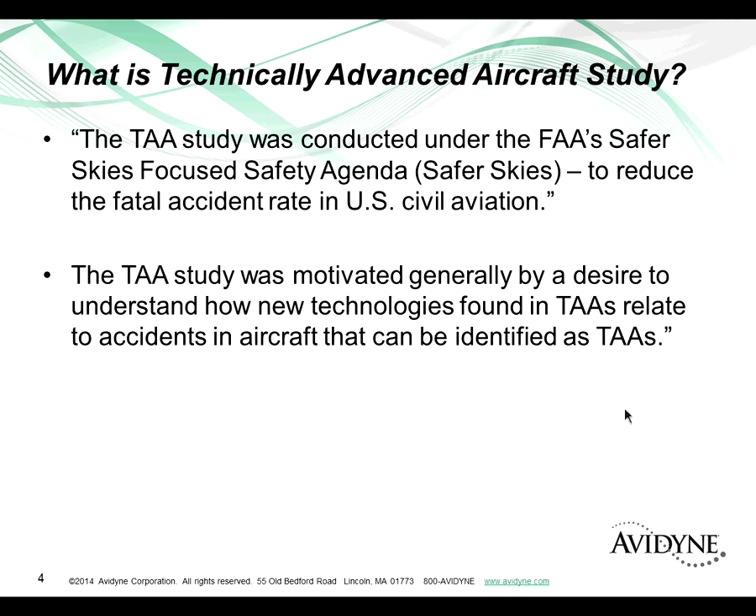But first of all, what is a technically advanced aircraft? The best way to describe it is basically any aircraft that has an IFR certified GPS, a moving map display, and an integrated autopilot. Notice that doesn't include the PFD per se, although most of those after 2003 were all PFD equipped. In general, TAAs are aircraft in which the pilot interfaces with one or more computers in order to aviate, navigate, and communicate. So you can see that encompasses a lot of airplanes.

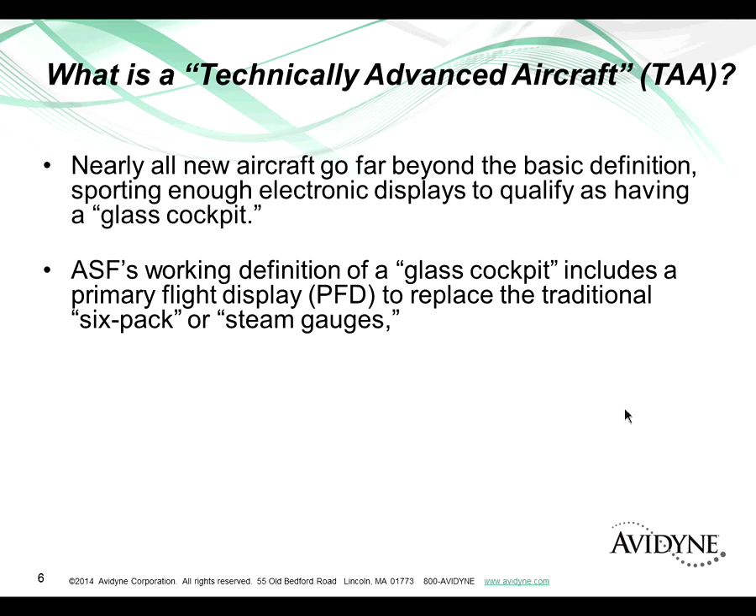Nearly all new aircraft since 2003, according to the study, could be qualified as glass cockpits because they also have primary flight displays that have replaced the traditional six-packs. These are considered technically advanced aircraft.

This goes back to when, after the General Aviation Revitalization Act was signed in the mid-90s, Cessna started building airplanes again, and they had the KMD550, a KLN94, and a KAP140 autopilot. That met the criteria - it had an IFR GPS, an MFD, and an integrated autopilot. So even though it was a six-pack airplane, it was considered a technically advanced aircraft.

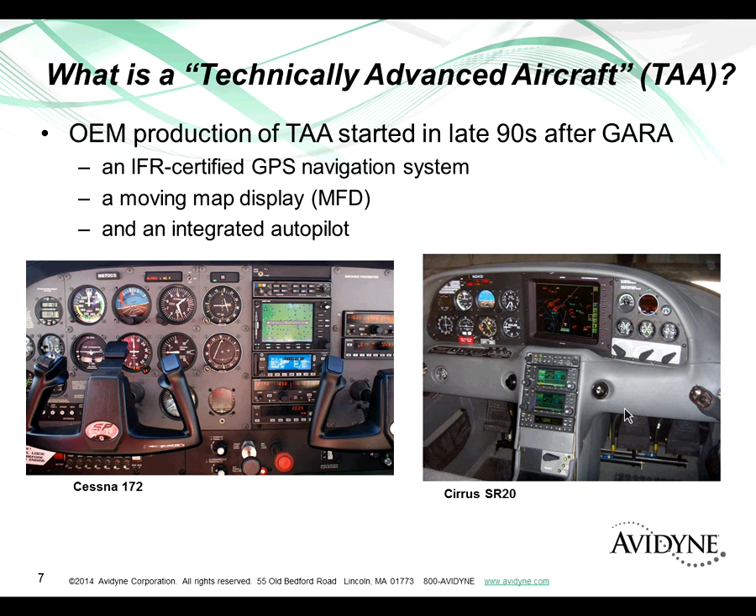Cirrus had come out with their new aircraft, originally with the big ARNAV MFD along with dual 430s, and they put an STEC system in a lot of those airplanes. So that, again, was a technically advanced aircraft without PFDs.

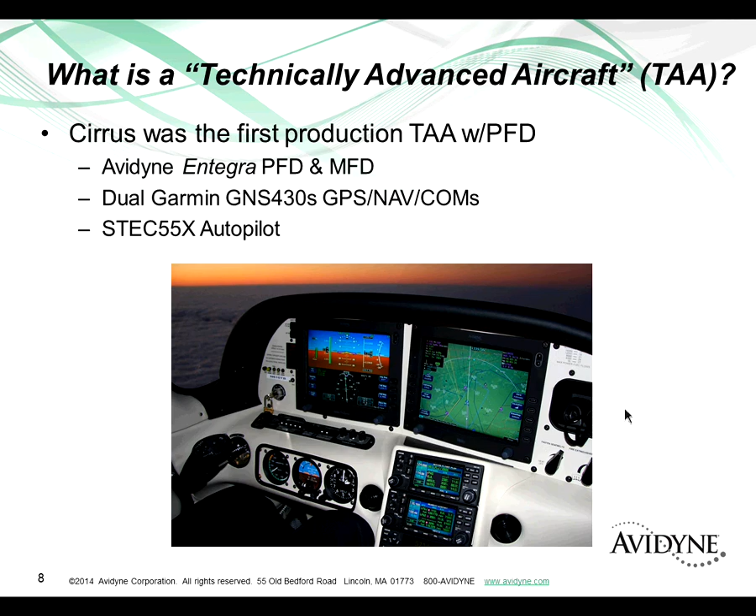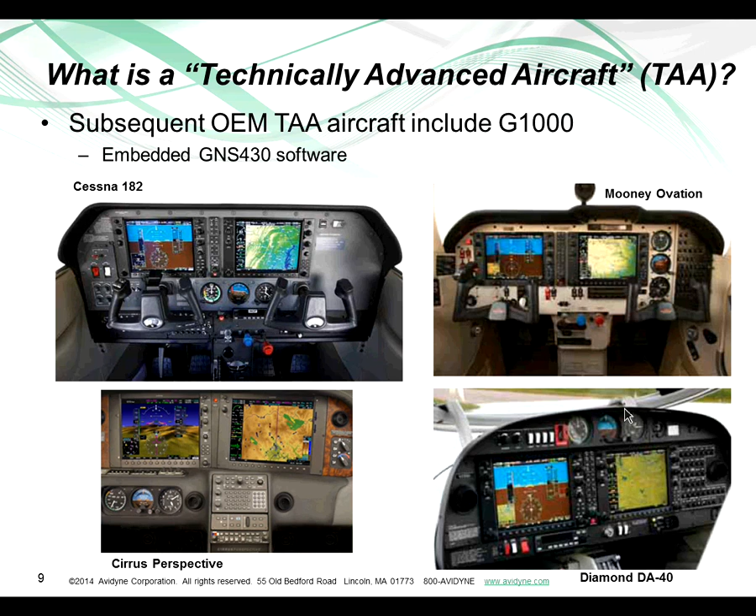The follow-on to that was Cirrus being the first technically advanced aircraft in light GA with a primary flight display, the Avidyne Entegra PFD and MFD, again dual 430s and an STEC autopilot. Subsequent to that, other OEMs - Cessna, Mooney, Diamond - and then Cirrus went to the Perspective in the 2007-2008 timeframe. Basically the G1000 systems are all GNS 430s with the faceplate cut off and the same software embedded into the big screen, but it behaved and operated very much like a panel-mounted 430 or 530.

There are also older aircraft prior to that which have been retrofitted and become technically advanced aircraft. You take an older aircraft like a Bonanza, put in an MFD, an IFR GPS, an autopilot, and whether it has an Aspen PFD or not, it can still be classified as a TAA.

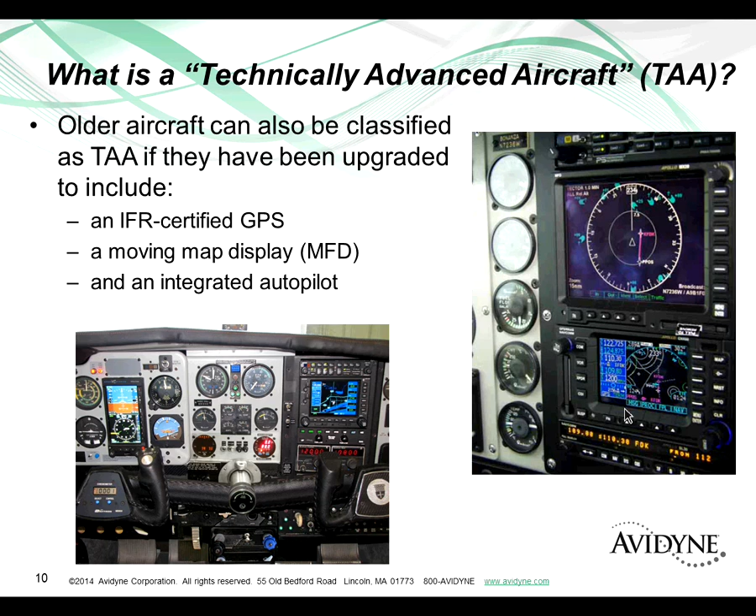And of course the safety concerns are that all these cool new gadgets are sucking up pilot resources, resulting in a lot of heads-down time because of all the cool new gadgets.

So here's the primary findings. The predominant TAA system-specific finding is that the steps required to call up information and program an approach in IFR-certified GPS navigators are numerous, and during high workload situations they can distract from the primary pilot duty of flying the aircraft. Basically they're saying pilots are spending too much heads-down time programming their FMS.

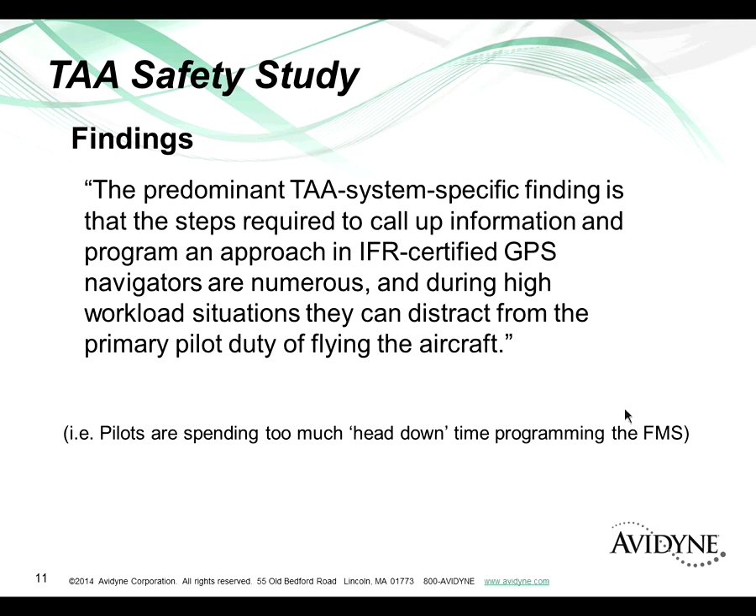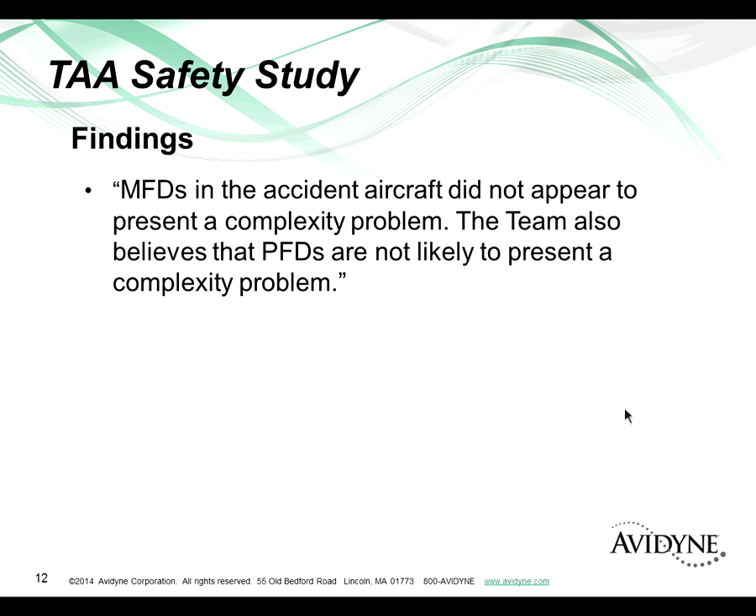They followed that to say, by the way, MFDs in these accident aircraft did not appear to present a complexity problem. The team also believes that PFDs are not likely to present a complexity problem. So it wasn't the PFDs and the MFDs that were causing the concern, it's the FMS.

TAAs provide increased available safety, which is an interesting way of looking at it. They believe there's a lot of potential for safety, but it has to be unleashed or exploited by additional training and other means in order to take advantage of it.

Obviously, by having an MFD you know where all the special use airspace is, if you have XM you know where the weather is. You've got an IFR GPS, you can stay right on course and not deviate. There's a lot of power pent up in the technology, but if you're not using it properly or not trained adequately, the pilot isn't necessarily getting the available safety that he paid for. So anyway, we took all of this data, and the big takeaway for us was that these FMSs are just hard to use and they require a lot of heads-down time.

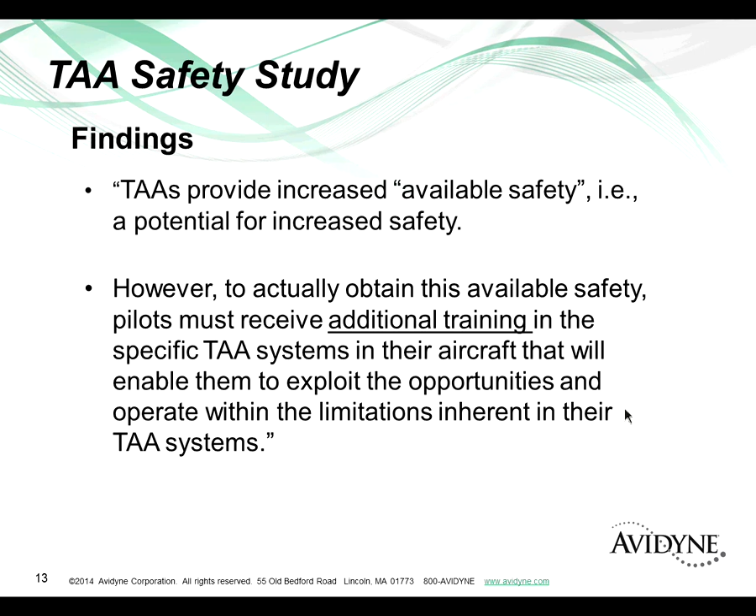Their findings suggested that manufacturers such as Avidyne and others should make available, and TAA owners should install, systems to improve the pilot's awareness of hazards to flight and the status of automation systems, and to simplify the process of executing IFR approaches. So those are ways that we as manufacturers can improve the safety record and make technically advanced aircraft easier to use and therefore safer.

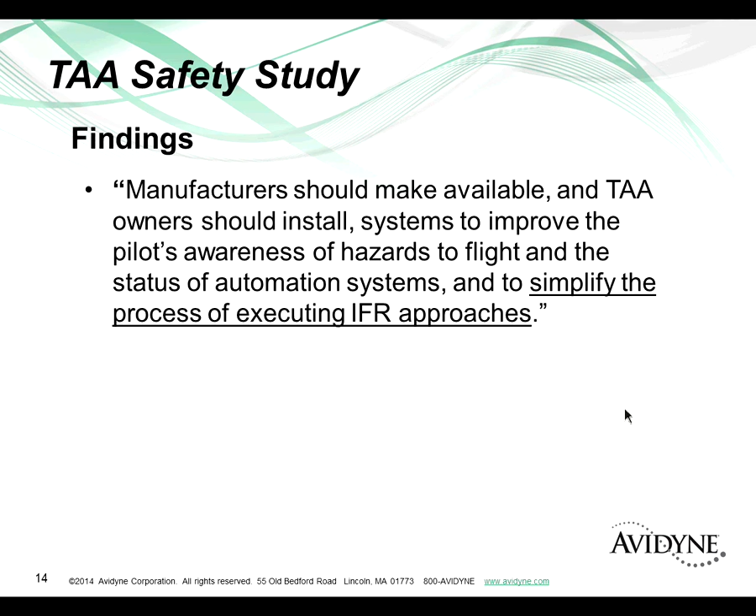So we took that study to heart, and we challenged our engineering team. Can we develop an FMS that reduces heads-down time? Can we simplify the process of executing IFR approaches? Can we make smarter systems that protect the pilot? Those were the challenges we set out as far back as 2003.

Remember, all the Entegra-equipped airplanes that were shipping out of Cirrus - we had probably close to 5,000 Entegra systems that were shipped.

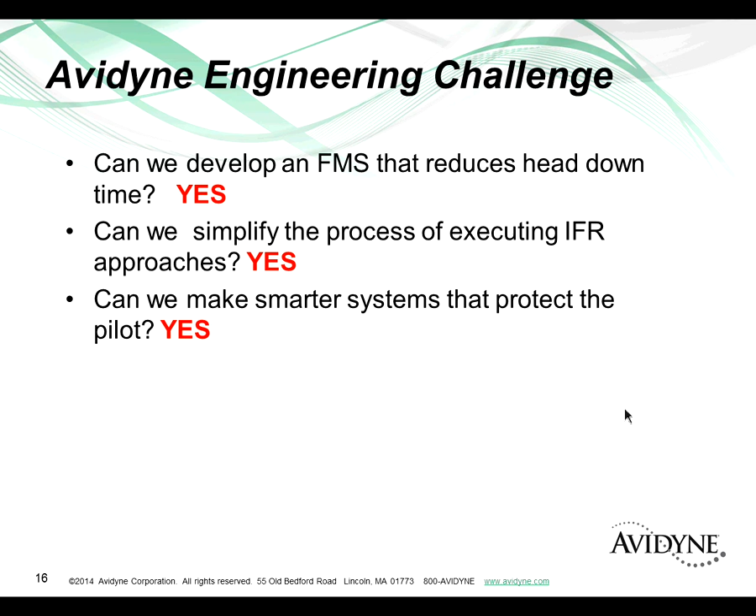All of those came with a Garmin stack of radios, and it's the FMS that was basically indicated in the study as being the root cause, or the problem, in a lot of cases with head-down time. So we thought, yeah, we have a way we can address that. We know we can answer these questions affirmatively, and let's get to work doing that.

So the first thing we did is we made the next generation of integrated flight deck, which will be called Entegra Release 9, and it incorporated our FMS 900W, a much easier to use flight management system. If you look in the pedestal area, you can see our FMS keyboard displaced the dual 430s that were in the panel. We also replaced the old displays with new displays, each with its own radios, its own GPS, its own AHRS. So we got rid of the 430s and put in an FMS system that really addressed a lot of the concerns of the TAA study.

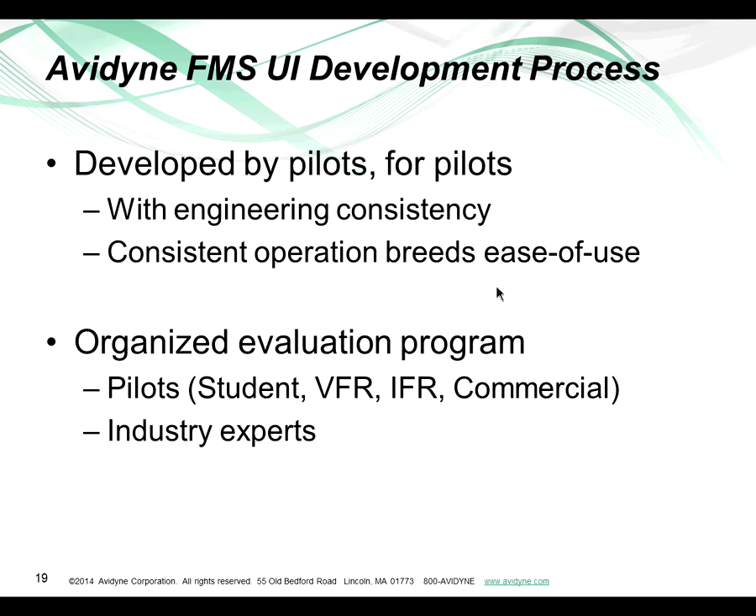Graphical aids, using color-coded rows, putting pictorial views of holds and procedure turns right into the FMS—I'll show you some examples. Nice, easy-to-read fonts and plain English terminology. A flat menuing system, none of these nested menus where you're drilling down four or five levels deep. And again, unambiguous controls—was I supposed to push the button in before I turned, or push this button before that one? Ways that we can take all the guesswork out. You don't need to memorize, you don't need a secret decoder ring. Even most of our customers are kind of low time—they're flying less than 100 hours a year, and it's hard to memorize how to operate these things. So you need to make it intuitive so that at a glance they can figure it out, and that's really what our goals were.

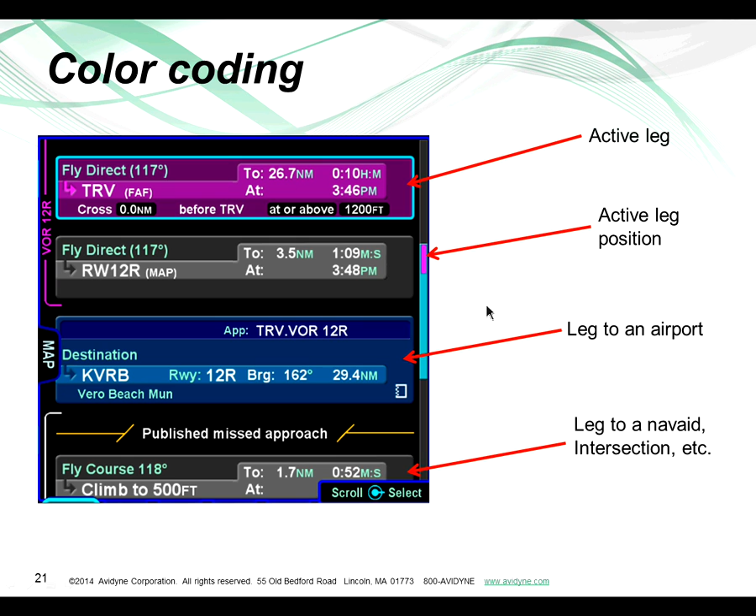When I talk about color coding, here's a look at our FMS, which looks significantly different than anything you've seen on a 530. The active leg is magenta. The destination or airport leg is in blue. You can see the scroll bar here—this means the flight plan is this long, but we're viewing what's blue here. The blue block represents how much of the flight plan we're viewing, and the active waypoint is represented here. So it makes it easy to tell where you're at in the flight plan at any given moment.

You've got plain English readouts. How you're supposed to get to the end point is laid out—you fly course 118 degrees. Instead of just having 118 up there, we tell you what to do: you're going to climb 500 feet, fly heading 360, and intercept the next leg. It's all plain English, and it makes it really obvious what to do next. Even our holds give you a graphical view of the direction of the hold, etc.

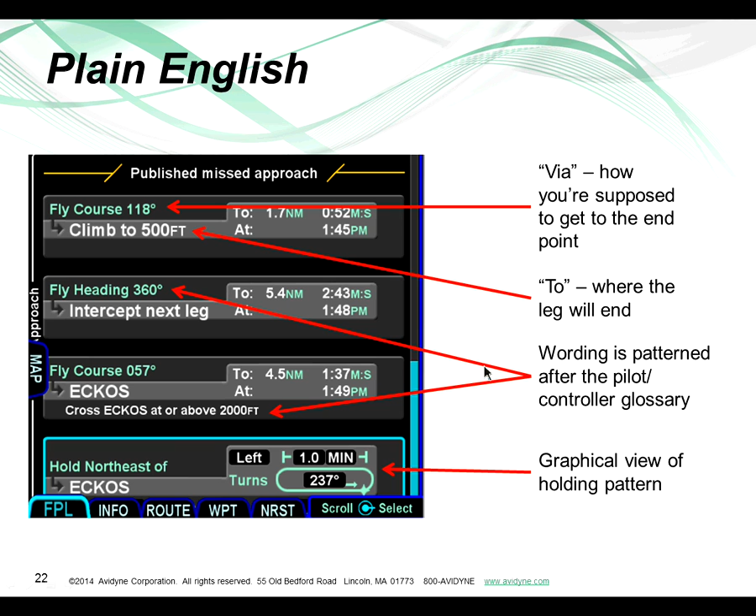We also have an insert cursor. How many times have you gone to enter a waypoint into a flight plan, and on the older boxes you move the cursor over a waypoint, and when you start typing the new one by spinning the knob, is it going to go in before the existing waypoint or after it? You don't know. It's very obvious with an insert cursor—it's unambiguous, and it takes the guesswork out of it.

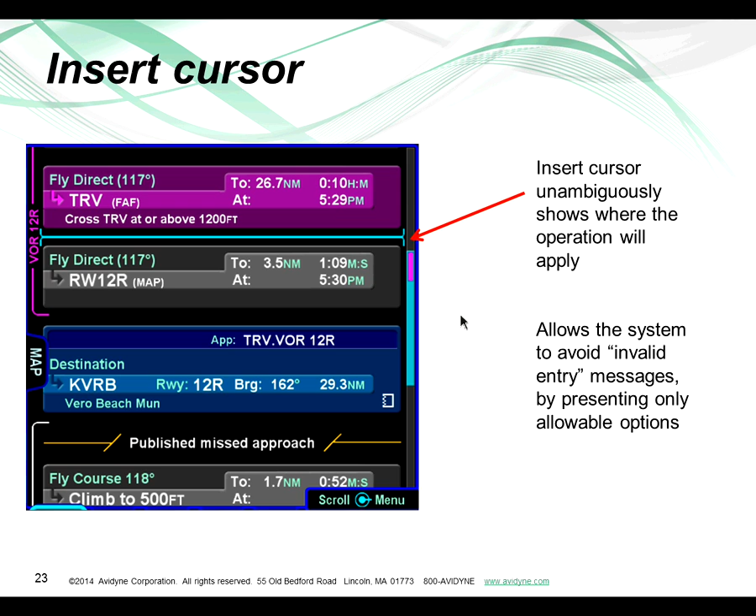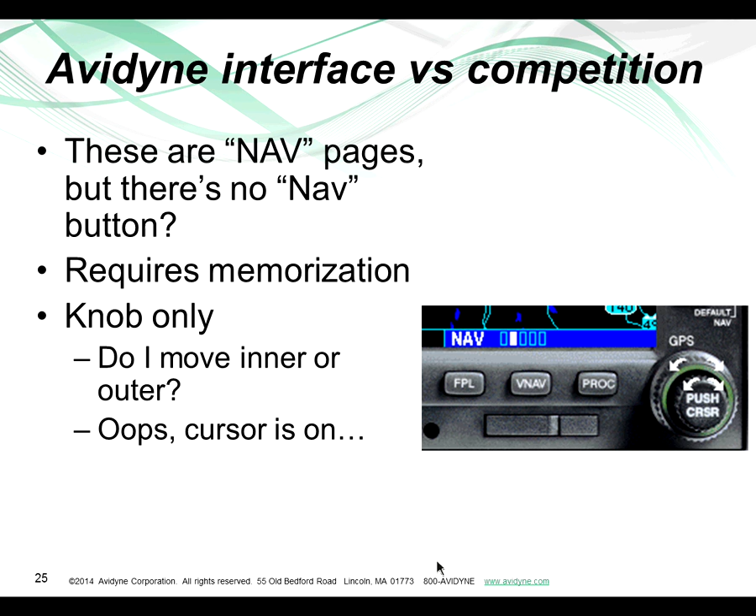Compare it with the GTN, the newer touchscreen box from Garmin. It has the same basic underlying page theory as the Garmin GNS, but it's reskinned with a graphical hierarchical menu system. It's still hard to tell what page you're on, what other pages are available — it's not grouped by subsystem or those sort of things. And they jumped in with both feet with touch, so they don't give you the option of having knobs and buttons, which we think is really important depending on your phase of flight.

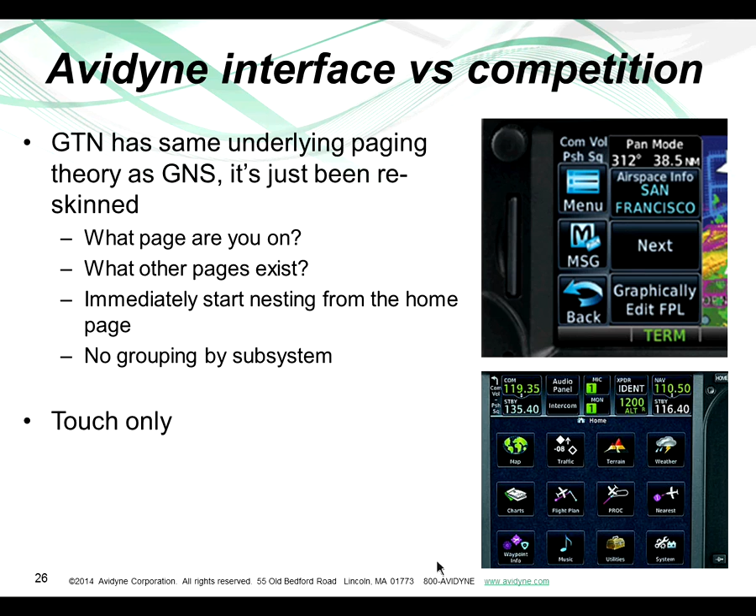Geofill — this is an algorithm that Avidyne developed. It predicts the intended identifier based on proximity and the type of facility. It's context aware, so it knows if you're doing a direct to or entering a waypoint into the flight plan. It basically nominates the next waypoint after 1 or 2 keystrokes based on distance rather than just searching alphabetically in the database.

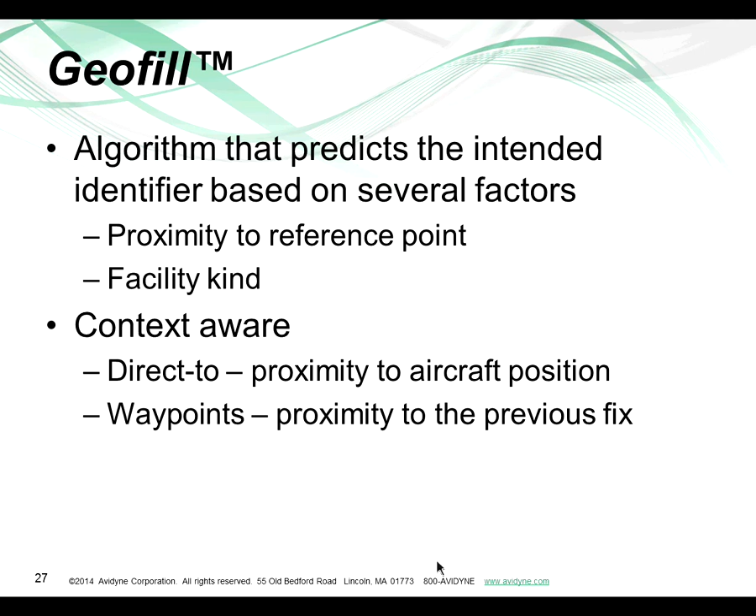We've found in doing extensive testing that Geofill, when using knob turns, reduces the knob clicks and button pushes by as much as 75%. And even when using the keyboard, it showed a significant improvement as well.

Here's a Geofill example — let me take you through it. It looks like we're building a flight plan. Notice on the map I'm sitting at Melbourne Airport in Florida, but I'm building a flight plan in this case to Albuquerque, the Socorro VOR, and El Paso.

If I were to type direct to and entered the letter D, Geofill is going to give me DHP, which is the Dolphin VOR, the nearest VOR that starts with the letter D, or the nearest actual nav aid. So it gives me something near where I'm at, which makes sense because I'm doing a direct to.

Conversely, if I were building the flight plan and typed in the letter D over here, it's going to nominate the Deming VOR, which is in New Mexico, and that makes sense in the context of that flight plan.

By entering 2 knob pushes, I bring up the FMS menu, and of course I can knob it in like I could with a 530. The outer knob moves the cursor, the inner knob changes the value. So we can still enter that way on a 540. We also have a QWERTY keyboard, but for the sake of this discussion, we did it without it.

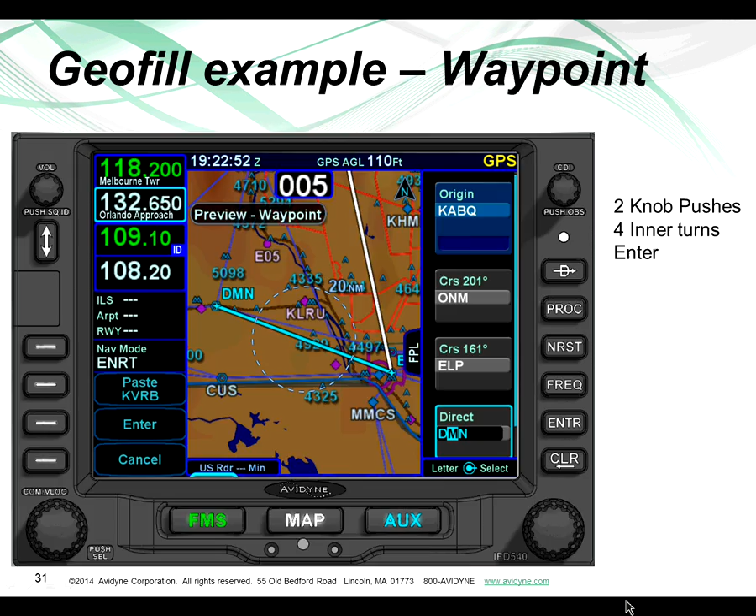Compare that with entering the same thing on a 530. It would require the inner knob 8 turns, the outer knob a turn, then 13 inner turns, then 1 outer, then 14 — you get the idea. Then you have to enter, and select DMN, the one in New Mexico, instead of the one in Germany. So you can see the significant amount of head-down time and knob clicks and button pushes required to enter a simple waypoint in the old system versus our methodology with Geofill.

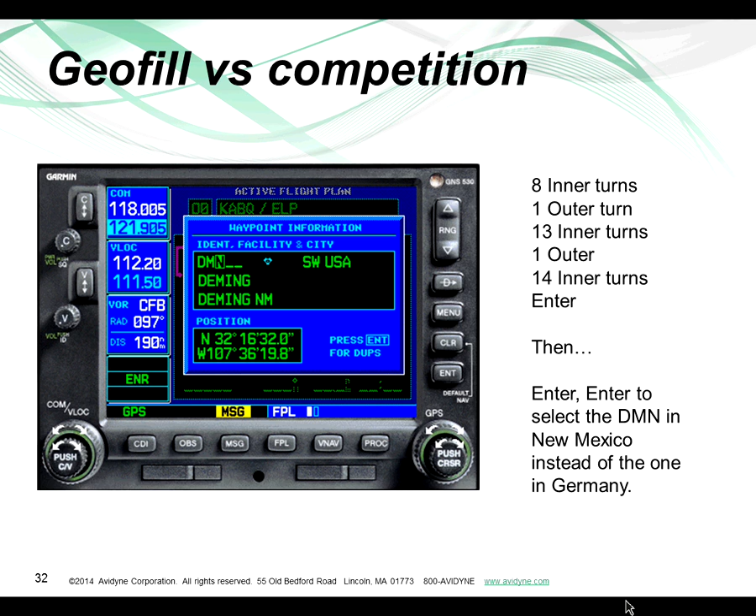And here we are with the keyboard. With the keyboard, it's 2 knob pushes and you touch the letter D. Our 540 has integrated Bluetooth and Wi-Fi, so if you had a Bluetooth keyboard, which will be an option going forward, you could just reach down and type the letter D and it would automatically enter it. It's literally 1 keystroke to enter a waypoint versus however many you want to total that up to — that's over 30.

Another nice thing we implemented in the 540 and also in R9 FMS is a kind of continuous flight plan. There's no need to activate an approach. If you don't have a suspend mode, it'll automatically connect and activate the next leg, unless you have a break. Here's an example from Melbourne to Daytona Beach.

Notice the flight plan goes to Smyrna, and then we've loaded an approach, so there's a gap that we need to close. Let's expand that. Looks like we need to go to the COCAD initial approach fix.

So notice here, down on the FMS, we have a little button that asks: do you want to connect Smyrna and COCAD? We ask you, it's the next logical thing. We call this our FMS butler, that little button in the lower left corner. It gives you the options.

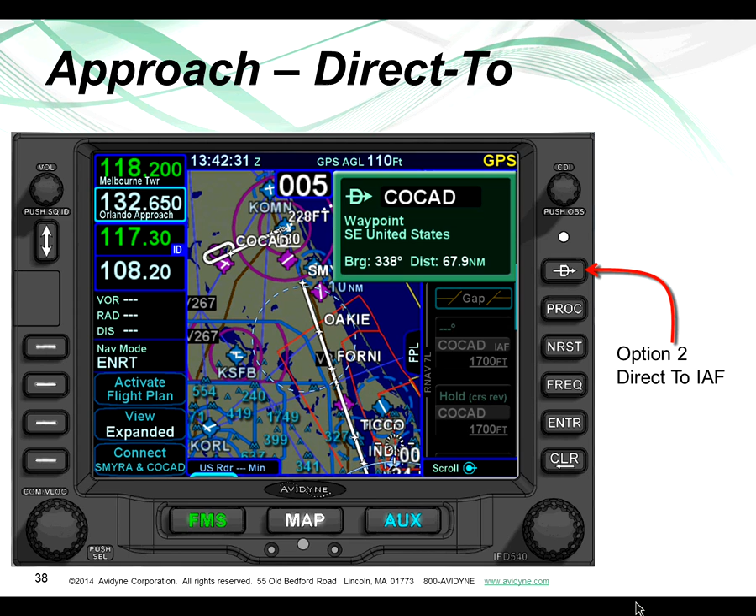You can connect it, or scroll down and go direct to COCAD, which bypasses the gap. Or you can scroll down to any other waypoint if you're cleared to another waypoint further down in the approach, and just activate that leg. So we make it very easy, and it's all in plain English. You don't have to memorize anything.

And then here you can just activate the approach with the butler, in which case it'll close the gap for you. So it makes it a lot simpler to execute a transition to an approach.

If you're doing vectors to final, notice you've got the gap here. In this case, we wouldn't close it—you'd be vectored until it was time to get cleared onto the next waypoint, and then of course you just fly direct. So this FMS butler provides a way of keeping you ahead of the FMS.

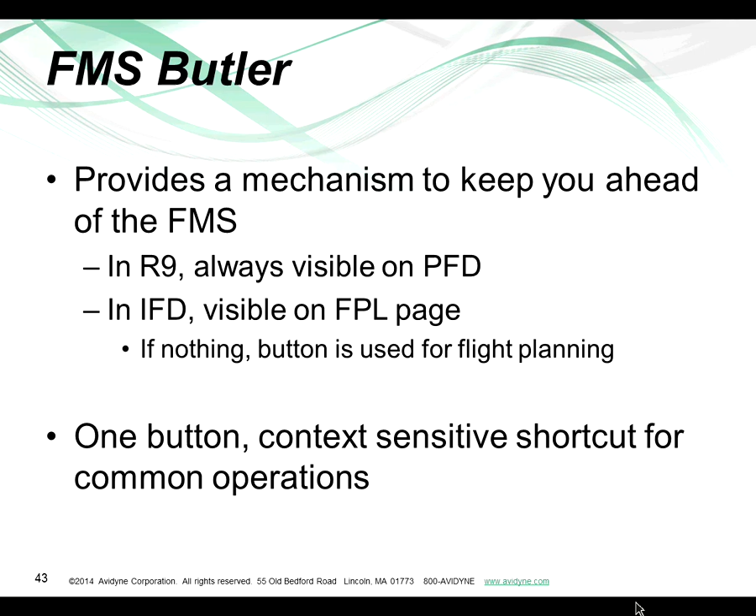On the IFD540 it shows up right there on the flight plan page. It basically gives you one button, context-sensitive shortcuts for common operations. Remember, the focus here is how can we reduce the button count and the head down time. This FMS butler is going to activate approaches, enable a missed approach, allow you to exit a hold, continue a hold, etc.

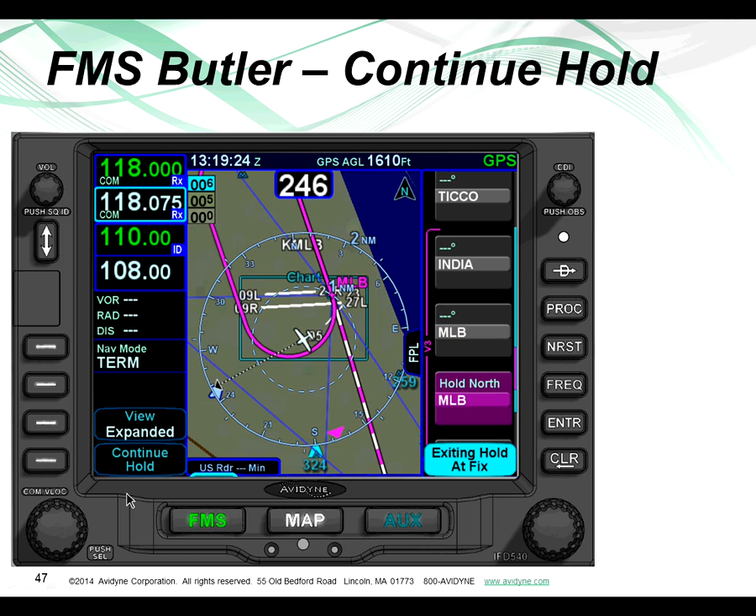Our engineers came up with a really elegant way to meet the requirements of this TAA study—easier to navigate with the page and tab user interface. There's no nested menus, clearly labeled buttons, it eliminates the need for memorizing, and reduces the amount of do-overs.

We've got easy airway flight planning. You'd literally select an airway, select an exit point, and it'll load all the intermediates. I mentioned geofill—it's going to reduce the keystrokes required, making it much easier to change your IFR routing on the fly, even in a heavy workload situation. That makes all the difference in the world.

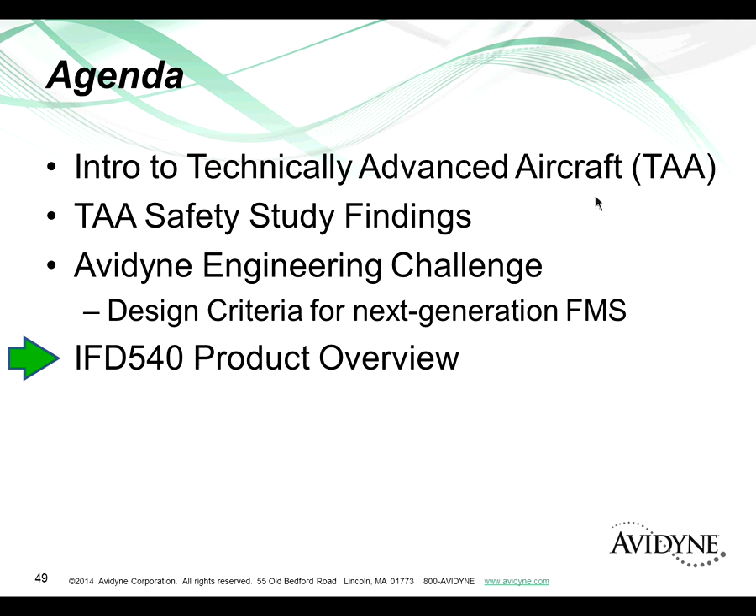We also do station identifier lookups for comm radio, so you know who you're talking to before you push to talk. I'll show you a little bit of that as we talk specifically about the IFD540.

That's our new panel-mounted GPS nav comms, the 540 and 440. They're based on R9, and you can see here's the R9 system. Each one of these displays is basically a card cage with these little blades in there. Notice this is a VHF blade—it's got a comm, a nav, a glide slope, and a marker beacon antenna on it. And this is a GPS blade, and those just plug right into the back.

There's also what we call an ACR, a computer resource. This is a double wide. In the case of the R9, there's an ADAHRS blade in there as well. And each of these boxes are identically populated, and they work really well.

They've got the page and tab user interface. So we've taken all that technology and put it into the standard mark width box, so we can retrofit it into the lion's share of airplanes out in the GA world.

It's got the same dual comm, dual nav in each box. Each box will receive dual nav and dual comm. You can transmit on one, but you can actually receive on two channels. It's 10-watt comms with a 16-watt option.

It has the same page and tab user interface, but we've added touchscreen capability now, so we've got what we call hybrid touch. That means we've got all the knobs and buttons, but we also have touchscreen, so it gives you the choice. And then, of course, the 440 is just a smaller version of the 540.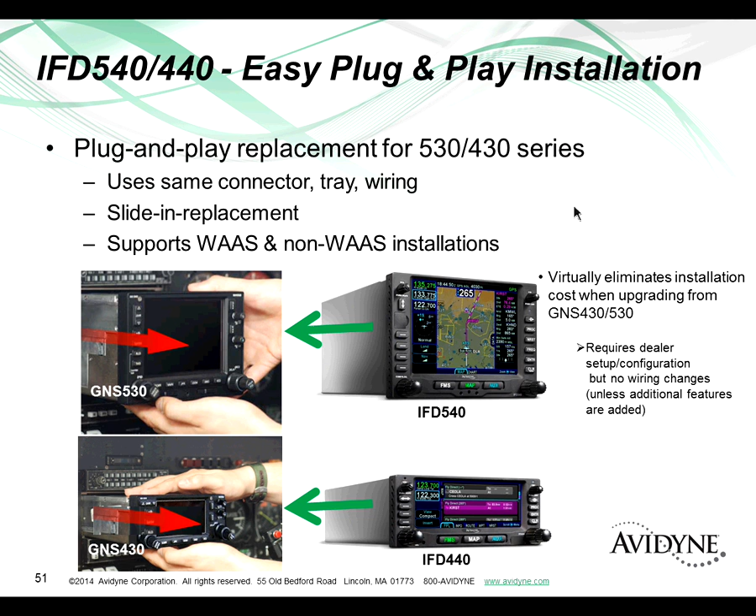There are a few additional functions you might want to wire in, but if you want similar functionality, you'll get a few things anyway. Simple plug and play makes it really more affordable from an installation point of view, so you're not tearing up your panel. You don't need more panel space. It uses the exact same wiring and connectors, etc.

We also leverage the byte flight data bus of R9. In the R9 system, that's the data bus that allows these boxes to talk to one another, and also inside the card cage, each of these blades talks to one another via byte flight. In a multi-unit installation like you see here, we use byte flight in place of a crosstalk, and that allows us to do the cross-syncing capability, so you can load the FMS with a flight plan on one box and it will automatically cross-fill it to the other for redundancy.

And you can do this keyboard convenience feature, which is really cool. That allows you to bring up a QWERTY keyboard on one box and have it drive the inputs into the FMS on the other. It's like having a virtually larger display that way.

From the outset, we knew that Wi-Fi and Bluetooth would be important as we move into a world with all the tablets and iPads and everything coming into the cockpit. So we have already certified all the 540s and will certify the 440 with integrated Wi-Fi and Bluetooth. The hardware is in all the boxes already - it's hardware enabled. We have a software release coming shortly, and it will enable the first of many features to come using Wi-Fi and Bluetooth.

You don't need to add an extra box and add a bunch of extra wires - it's all built in. The antenna is actually behind the logo, right on the faceplate there. So it's not only Bluetooth, it's also Wi-Fi, and we think there's some real benefits to having both. No one else has that.

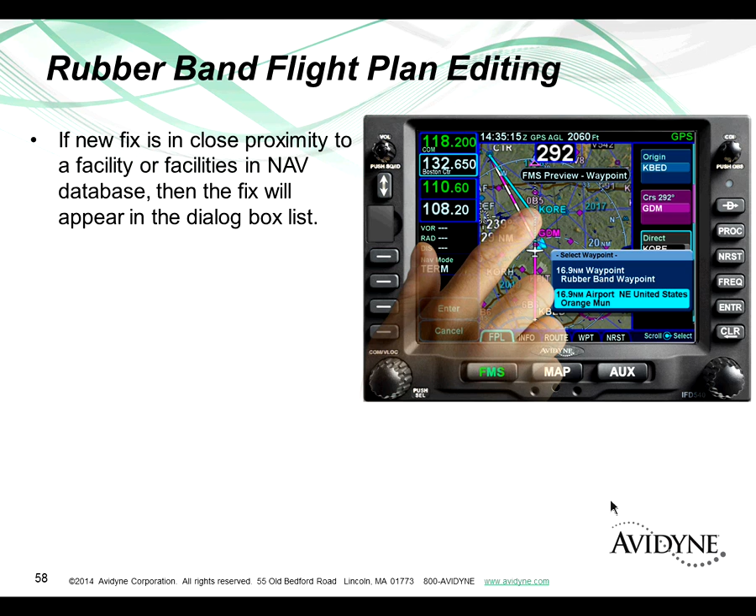Rubber banding is a touch-only function. You can touch any leg in the flight plan, stretch it anywhere you want, and let go of it. It'll ask you, do you want to snap to the nearest nav aid, in this case Orange Municipal Airport, or do you want it right where your finger really is, in which case it will automatically create a rubber band waypoint in the flight plan for you.

While we show the active leg as magenta, we also show the next leg as a candy cane, a segmented magenta and white. On a dog leg like this, that's not that big a deal, but when you're entering holds, it makes it really obvious what you're going to do next - am I entering a teardrop or am I entering a parallel hold? The next leg display is really a cool innovation.

If you're interfaced to a compatible fuel totalizer, we'll show the fuel range rings on the map. If you get within your 45-minute reserve, those will turn yellow.

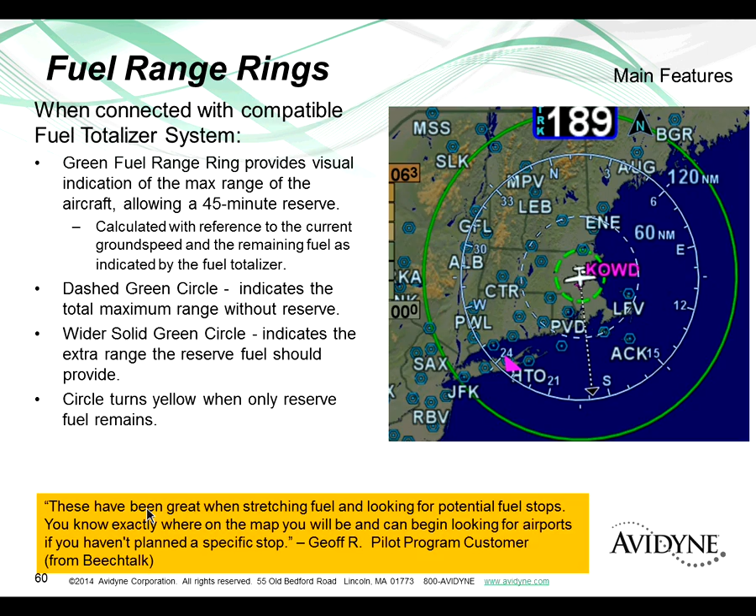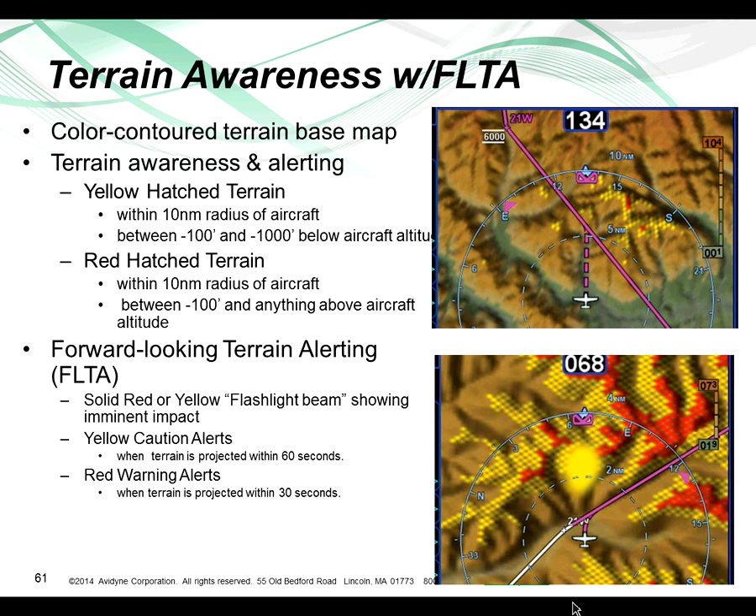We do the same thing with the obstacle database. We'll put what we call a threat bubble over an obstacle if you're within 5 miles and 2,000 feet vertically. If you get within 3 miles to these parameters, it'll turn yellow, and then it'll finally turn red. Again, you'll get the appropriate audible and visual alerting as well.

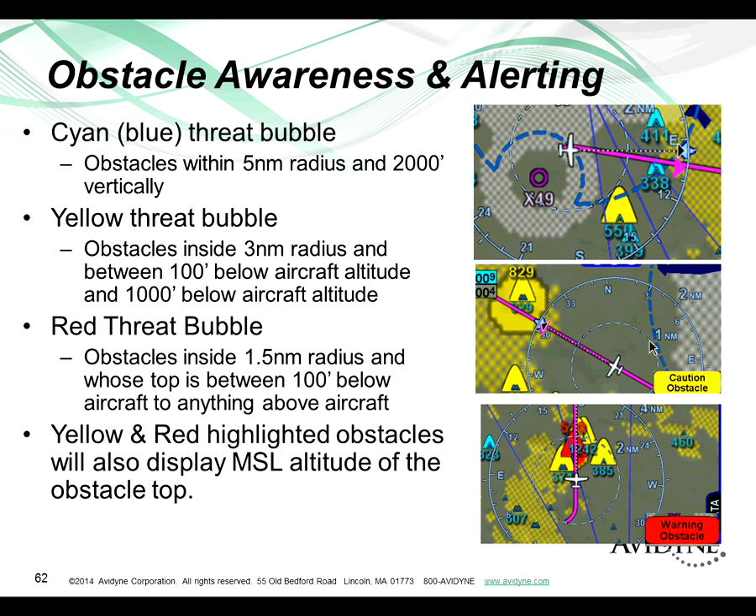Really nice features that help the pilot out in a technically advanced aircraft. We can put vertical constraints on waypoints, either as part of a published procedure, or you can manually enter them, and we'll show a top of descent marker here.

If you bring your data block out, it'll give you the vertical speed required to get to this waypoint. In this case, I want to be at OVIDO at 4,000 feet. Here's my top of descent. When I get there, I start my descent, and I'm going to nail it when I get there.

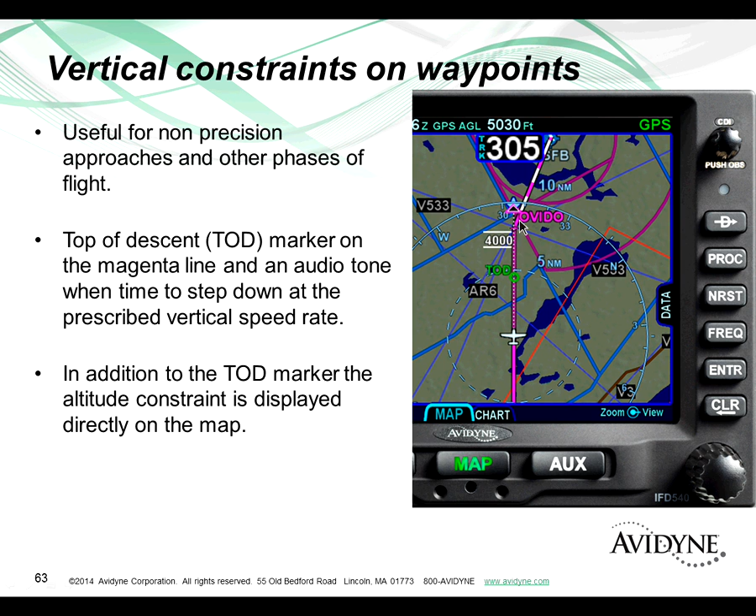If we jump over to the map page, notice there's only 2 tabs, one for map and one for chart. Here we're looking at the chart.

Compare that page and tab user interface to even the GTN. It's more of an app-based graphical user interface. You go into the flight plan app and load the flight plan, then come back to home, go to the map app and mess around in there, then come back and go to the weather app or the terrain app. You're kind of diving down the bunny hole and coming back up to the menu.

With our system, the 540, you can get to virtually any page in 1 or 2 clicks. So we've got a very flat menuing system, designed to reduce head down time and get the pilot paying attention to flying versus figuring out where stuff is in the box.

We do station ID lookups not only for the active frequency, but also for any standby frequencies. We have a frequency list button that, if you push it, will bring out a list.

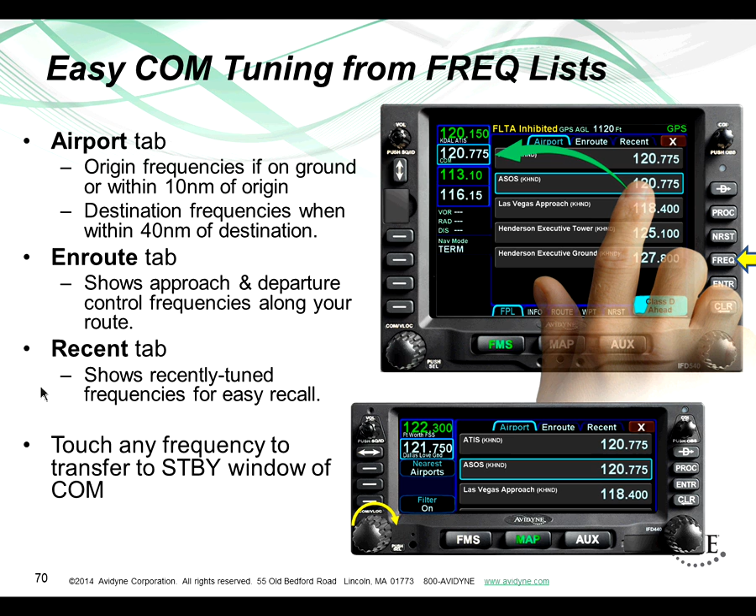We'll give you what we call an FMS preview, shown right out on the screen. As you scroll through the list of exit points, it'll actually build the flight plan out for you and load all those waypoints into the flight plan, without having to manually look them all up and figure out how to spell them.

The procedure button allows you to load procedures, load an approach. When you push that button, the map will automatically scroll to your destination airport, and as you move through this list—in this case there's only 2 different options—as you scroll through, we'll show a preview of the approach before you select it. Once you select the approach, you select the transition point: am I vectors to final, or am I going to the initial approach fix? And off you go.

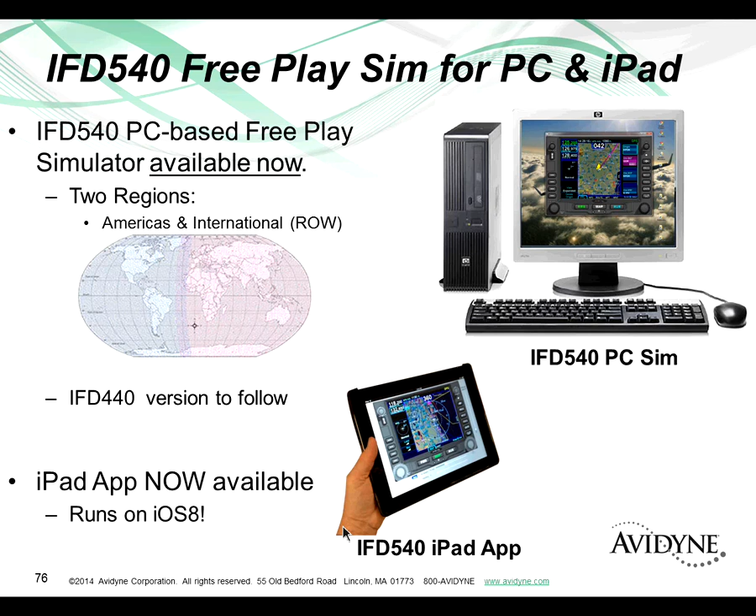So real quick, the 540, hybrid touch. Gives you the best of both worlds, touch screen and knobs and buttons. Multi-touch, we got pinch zoom capability. We're plug and play for the 530-430, so we're slide-in replacements. That lowers your install cost if you have one of those boxes already. The page and tab user interface allows you to get to any page in 1 or 2 clicks. GeoFill, easier data entry, easy airway flight plan entry, the convenience keyboard. Again, all this stuff combines to reduce head down time and eliminate the memorization.

We did announce a couple weeks ago our MLB100, which is an ADS-B FIS-B receiver, so you can get free weather on your 540 and some of our other displays. That'll be available in early 2015. We got a lot of questions about that—what are you doing for ADS-B in? We also have an ADS-B out transponder, the AXP340, that meets the mandate for ADS-B out. The pricing on the 540 is $16,995. It's now certified. The smaller 440 will be out in the early part of 2015.

These products come with a 1-year warranty, but actually it's a 3-year warranty, because once you sign up and register your warranty, we're going to give you 2 free years. So it's really a 3-year warranty.